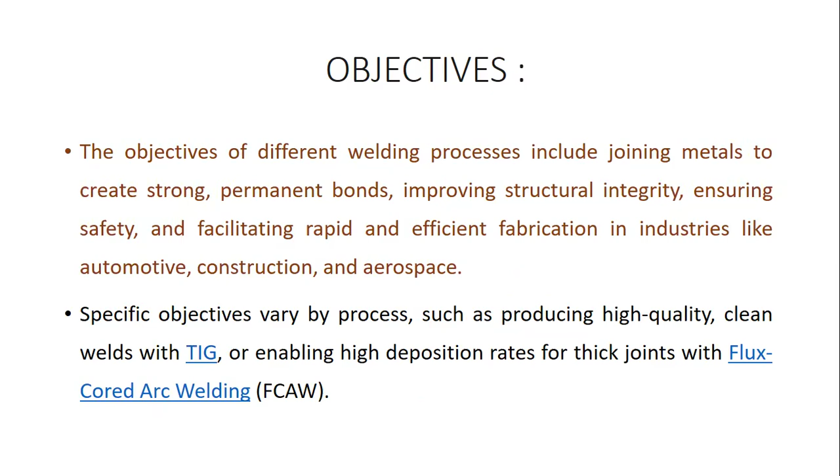The first one we are going to discuss is gas metal arc welding. In short form, MIG welding. It is a type of welding process which uses a continuous wire electrode, which is consumable type, and also a shielding gas is applied to protect the welded joint from atmospheric contamination and other oxidation problems in order to join the metals together by forming a strong bond.

The following materials are recommended for this welding process: steel, aluminum, and cast iron. These are the materials that are highly recommended for performing gas metal arc welding. How does this type of welding process work? The metal arc welding comprises a welding gun nozzle. The spool of wire is fed into the gun nozzle.

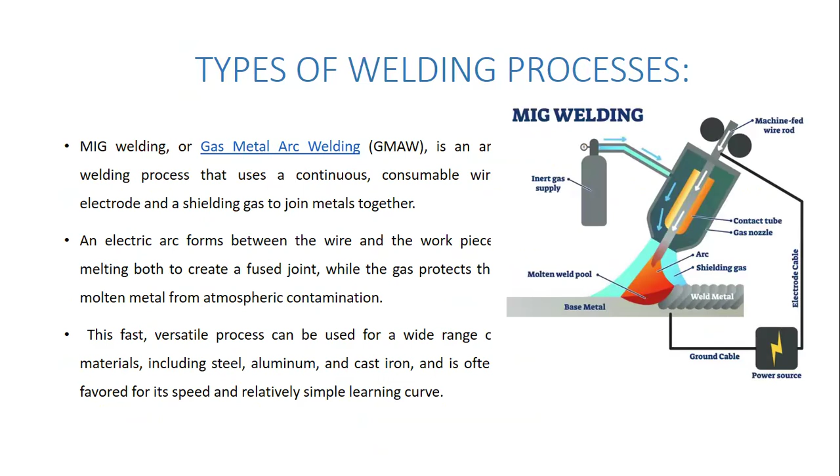In addition to that, a shielding gas exits the nozzle gun, thereby creating a protective cloud around the electric arc. This gas prevents foreign substances from entering the molten weld pool. It acts as a protective shield. Here the consumable electrode serves as both electrical conductor and also the filler metal to build up the joint.

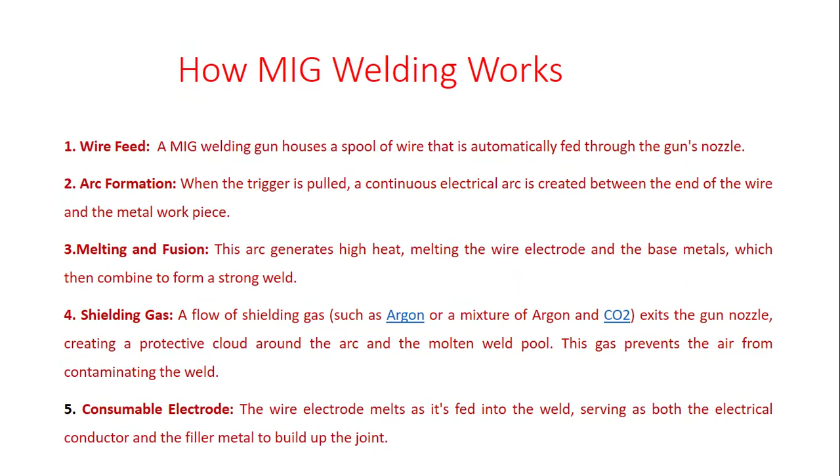The next type of welding process, in connection to metal arc welding, is gas tungsten arc welding. It is TIG welding, which comes under non-consumable tungsten electrode. Here, the inert gas, which is shielding in nature, produces a high quality, clean, and aesthetically pleasing welding joint. This type of welding is suitable for stainless steel and aluminum, especially for connecting thin section areas of components.

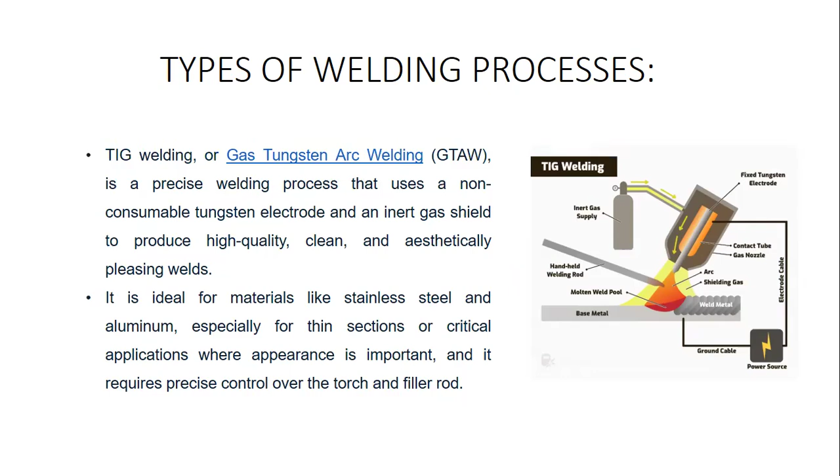In this process, an electric arc is created between the non-consumable tungsten electrode and the metal workpiece, which melts both the base metal and the filler material. The filler rod is manually fed into the molten weld pool in order to add material for the weld. The inert gas, say argon gas, acts as a shielding gas, which prevents the molten weld from oxidation and air contamination.

We are able to control the arc intensity of the weld and also the filler feed rod by manually coordinating with both hands of the weld operator. So this kind of welding requires highly skilled manpower to execute the welding operation on the shop floor.

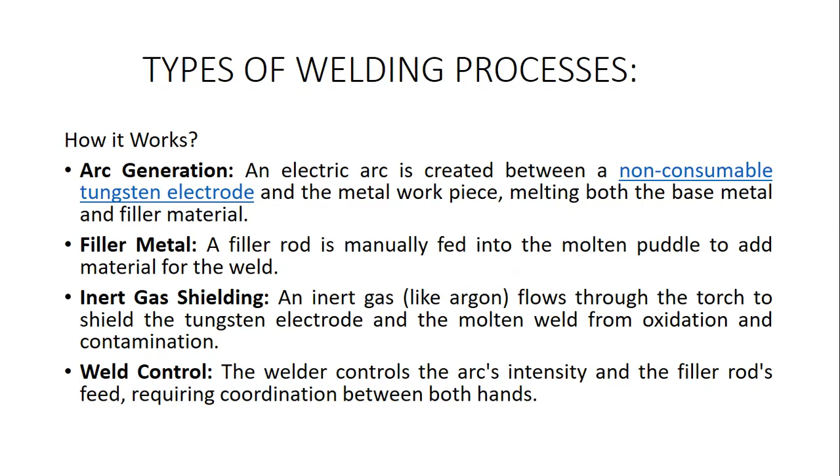Next one is shielded metal arc welding. It's nothing but stick welding. It is a manual arc welding process which connects the two metals with the help of the consumable electrode with the coated flux material. An electric arc is produced between the electrode and the workpiece material as per the figure illustration given on the other side of the column.

The flux coating vaporizes due to the continuous heat and protects the welded joint, and also a successive welded interface joint is produced without any pitfall. Thereby, it forms a molten slag layer over the solidifying weld.

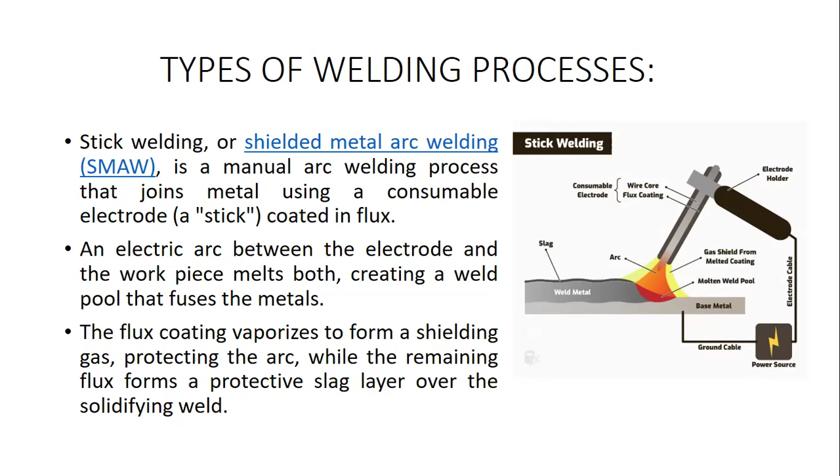How shielded metal arc functions. Arc ignition is produced with the help of the welding electrode. When the welding electrode is initially touched to the base metal, it tries to create a short circuit, then immediately pulls back to establish a stable electric arc.

So due to the continuous intensity of the stable electric arc, heat is generated from the electric arc. This helps to join the base metal and the electrode by a melting fusion process.

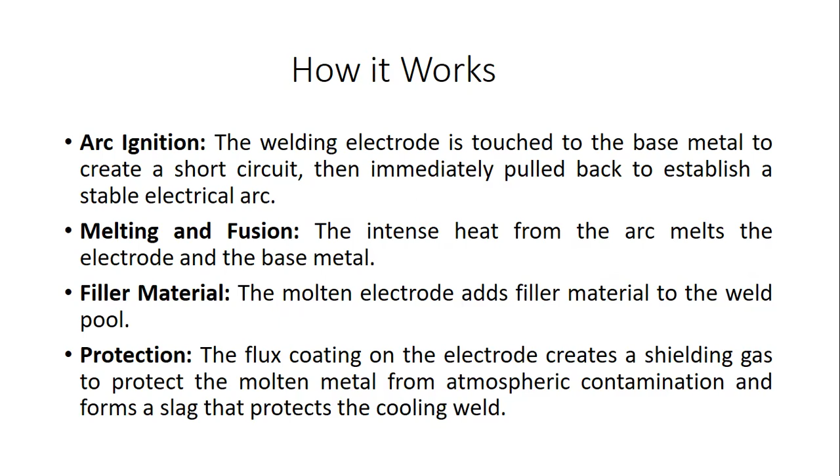The next type of welding process we are going to see now is oxy-fuel welding or oxy-acetylene welding. It is a gas welding type which uses a high temperature gas flame created by burning a mix of oxygen and a fuel gas, typically acetylene, for fusing the base metal. In this process, either with or without filler metal, we are able to carry out the oxyacetylene welding operation.

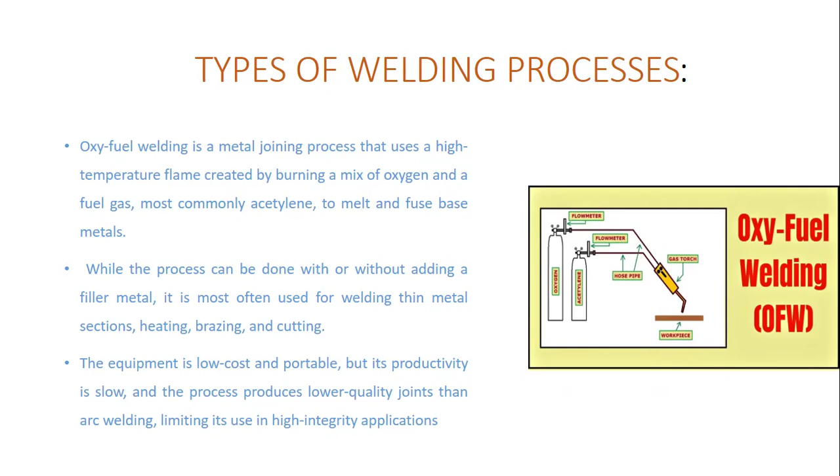The process involves heating, brazing, and cutting the metal. The equipment used for this welding operation is relatively cheap and easily portable, but the productivity of the welding operation is very slow. The quality of the welded joint is also lower compared to other welding classifications.

So how does this type of welding operation function? Here are some of the procedural guidelines listed below. Gas welding comprises a gas mixture. Oxygen is mixed with a fuel gas, say acetylene, to generate a hot flame.

When the torch touches the base metal, it produces the flame. The flame increases the heat intensity. This heat fuses the molten metal, connecting it together as a permanent joint. Finally, the welded joint begins to solidify by cooling.

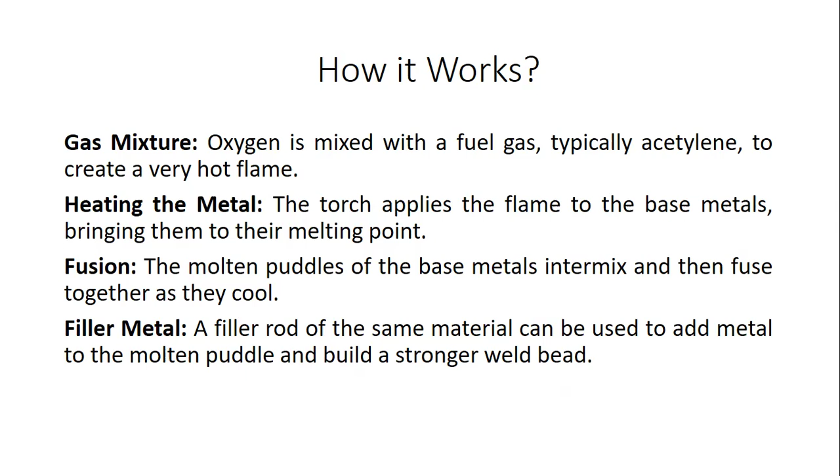The next advanced type of welding is laser beam welding. In this process, the metal workpieces are connected with the help of a high intensity laser beam. This type of fusion welding can be used in mass production industries like automotive and aerospace due to its high speed, accuracy, and automation potential.

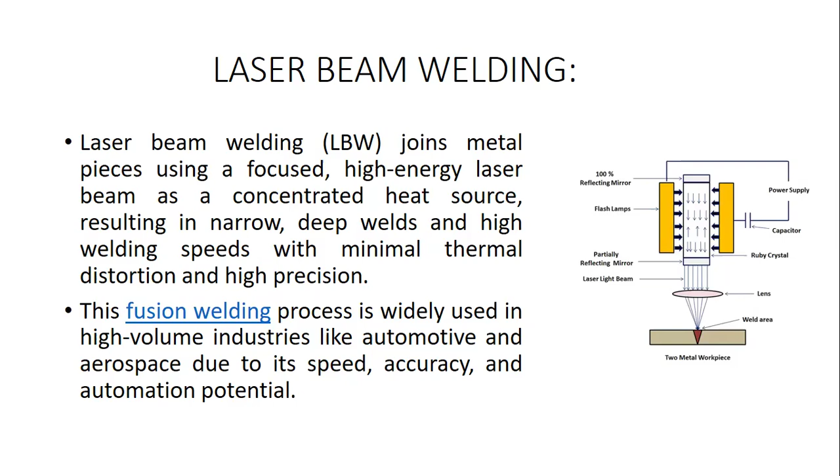A high performance laser beam generates a concentrated energy source. Through this energy, heat is released. The developed heat energy connects the adjoining sides of the metal workpieces by fusing them together. So this is the simple working principle of laser beam welding.

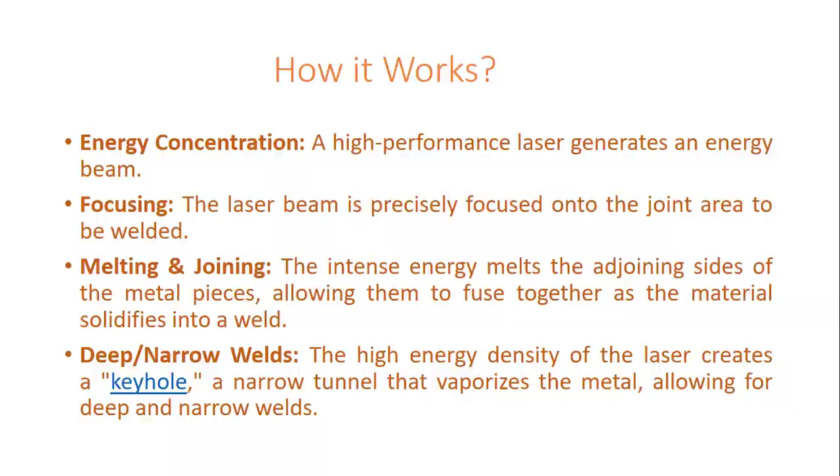The next one is resistance welding, which comes under the electrical type. It is an electrical welding process which connects the metal by applying mechanical pressure and passing a strong electric current through the material to be joined, using the resistance to the current flow. So it generates heat and fuses them together.

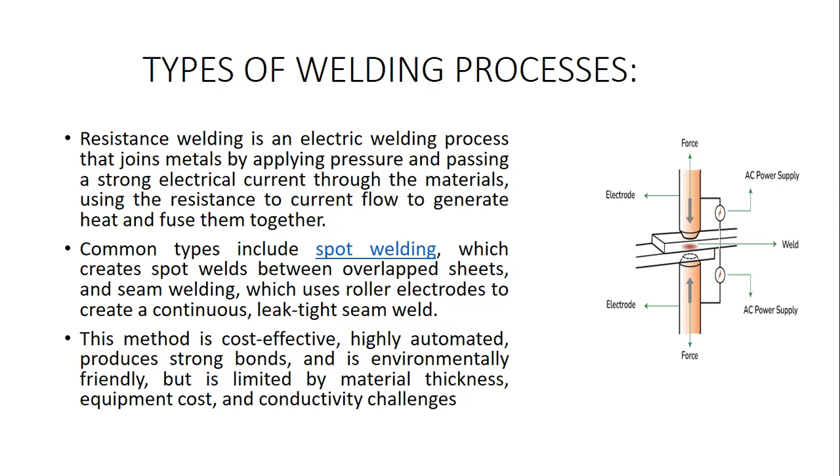The common types of resistance welding are spot welding and seam welding. These are the two types which come under this category. This type of welding is considered very cost effective, used under high automation, and environmentally friendly with less pollution. No gas is involved; it is an entirely electrical energy source.

Here the pressure is applied by the electrode mechanically touching the part to be joined. In parallel, electrical current is passed through the circuit, activating both the electrode and the workpiece material. Localized electrical resistance is set up across the circuit, creating intense heat that causes the metal to become molten. Due to the pressure, the molten metal is forced to join together, forming a strong interface between the two workpieces.

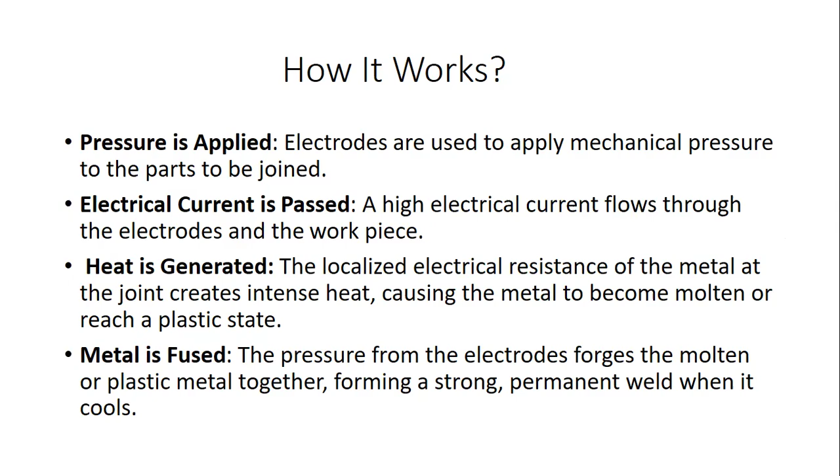So with the above information, what I mean to say is that there are diverse applications of welding processes that vary according to the wide range of materials and purposes of usage in modern industry today. So no individual can say this welding process is best or that one is best. It is not like that. Each and every welding process has its own unique features and potential characteristics.

Before choosing any welding process, we have to carefully consider factors like the material type, the thickness of the material you are going to weld, the type of weld joint you are going to adopt, the required weld quality, the budget for the welding infrastructure, and moreover the experience of the labor with the welding process. These are the most important factors to consider. Understanding the above techniques is essential for selecting the most suitable method for a given fabrication project in industry.